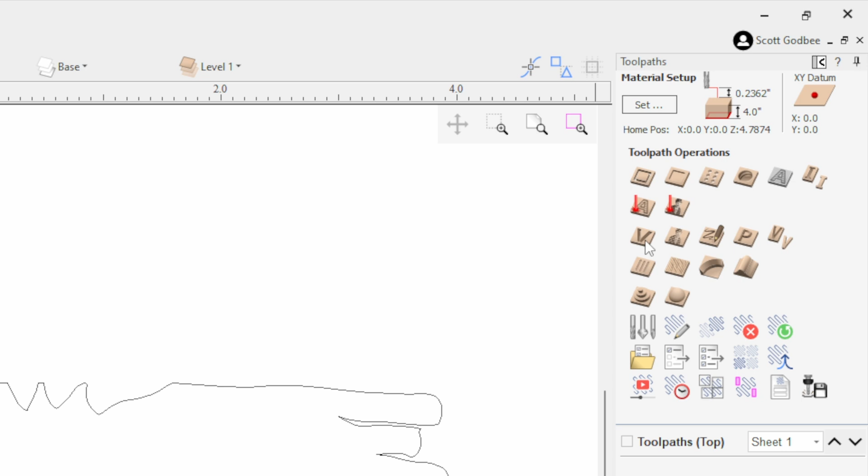Now this is the vector that I used to cut out the base and the inlay in the video you just saw previous to this. And this is going to take a little bit of editing for it to fit right. If I were to just use this vector as it is now, I am pretty sure that the inlay would not fit into the pocket. And here's why. If you have a general understanding of how vectors work in relation to the toolpath, if you don't, you should, and maybe this will help you understand it a little better.

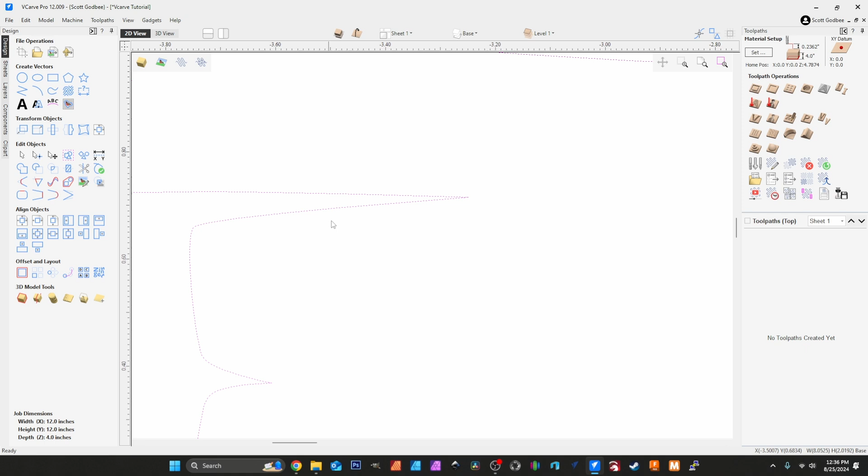You can consider a vector an impenetrable boundary that cannot be crossed by your bit. It can cut on the outside of it, it can cut on the inside of it, but it cannot cut through it. Now to show you an example of what I'm talking about, let's just create a circle. It'll be 1/4 of an inch in diameter. And this will signify just a standard 1/4 inch end mill.

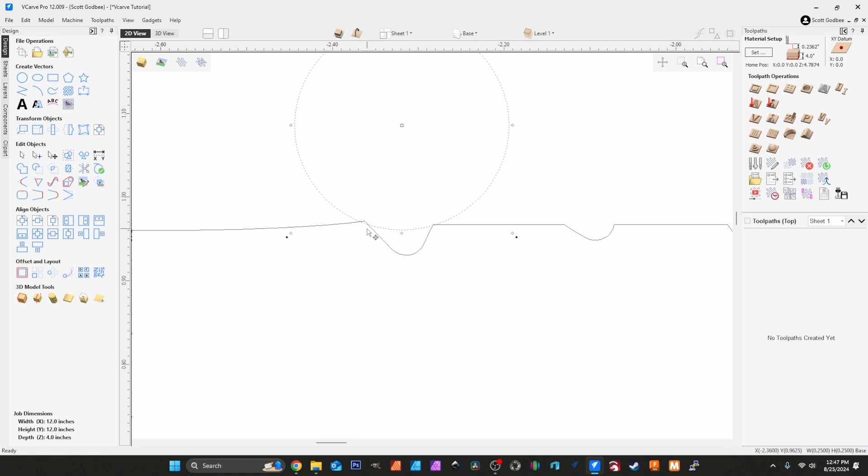If we were cutting on the outside of this vector, it would follow the vector, but when it comes to small areas like this, because the diameter of your bit is larger than the distance between these two vectors, it's not going to cut into here. It's going to keep going until it is able to cut in between two vectors, and there's not a whole lot here.

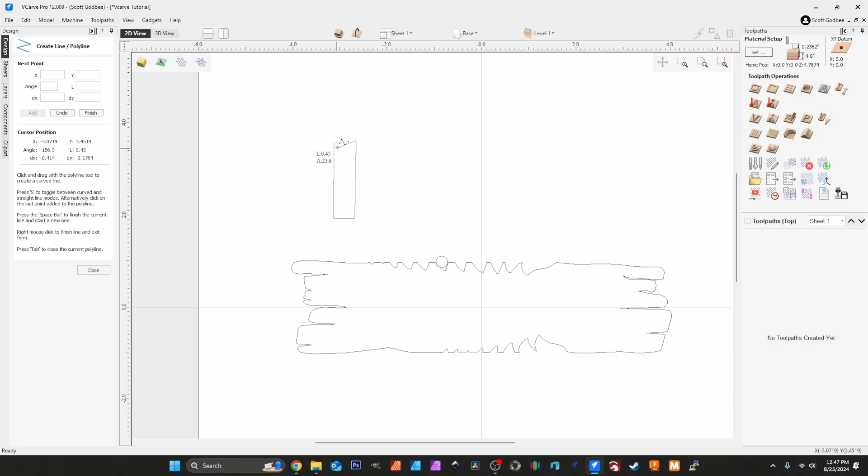Say for instance, if we were to cut into there, it would cut down that far, but it's going to leave this out. And it's going to do it all the way around here because, as you know, a standard end mill is going to be square. There's no taper. It's just straight up and down on both sides. Now when we're doing inlays, what we usually use is a tapered end mill.

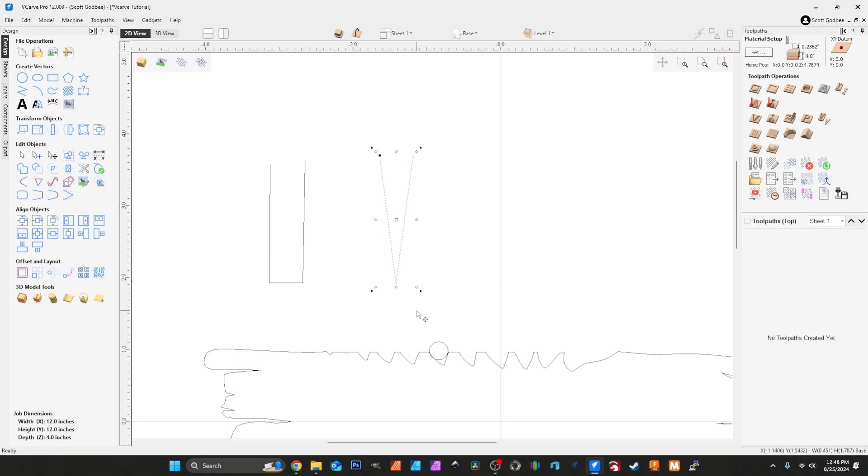And like the bit that I use for my inlays, the tip is 10/1000ths on the very bottom here on the tip, but it will increase as the angle goes up until you get to the top of the bit, and that's generally 1/4 of an inch depending on the bit that you're using. So the depth that this bit will cut varies because of the angle here as opposed to what it can get in between here. So let me show you another example.

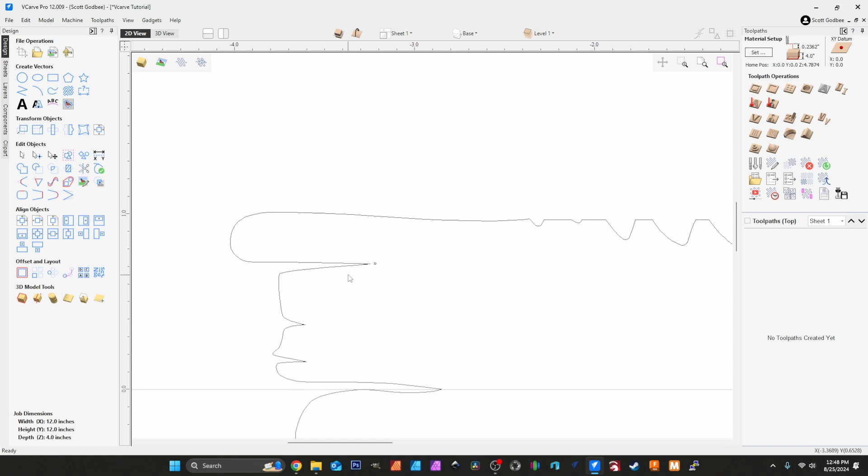Let's get rid of these guys here. Get rid of him. Get rid of that. Now let's create another circle, and this time we'll use a 10/1000th diameter, and this will signify the tip of your tapered bit, at least mine. Now some will vary. You need to know the specs of your bit. Some will be 10/1000ths.

I don't think they get any smaller than that. Some will be 15, 20, even 30/1000ths. So you need to know the specs of your bit to understand what I'm talking about.

But in this case, like we just talked about, if we were cutting on the outside of this vector, it's going to follow it around the entire distance of the outside of the vector because there's nothing inhibiting it from cutting the entire length. But if we cut in between these two vectors, following along here, it's going to stop. And now this is just the tip. This is 10/1000ths.

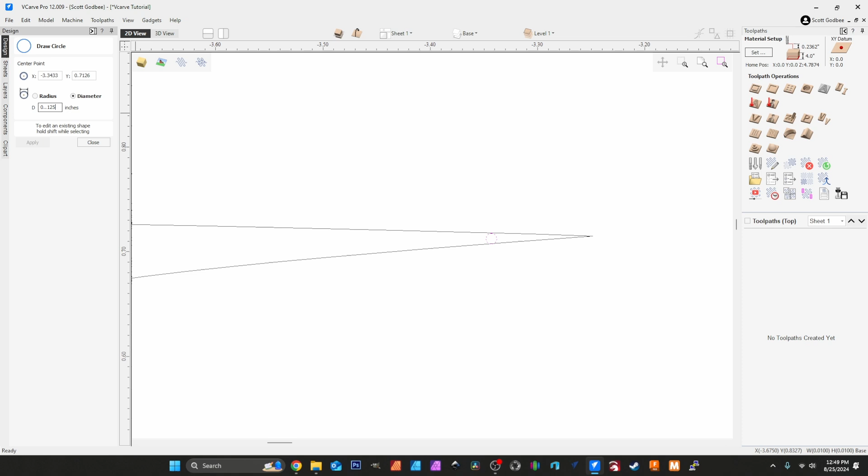If we're back here, let me leave this here. Let's create another circle, and let's do 1/8 of an inch. And this would signify further up your bit, your tapered bit, that part of the bit is not going to fit in between here, so your depth will vary.

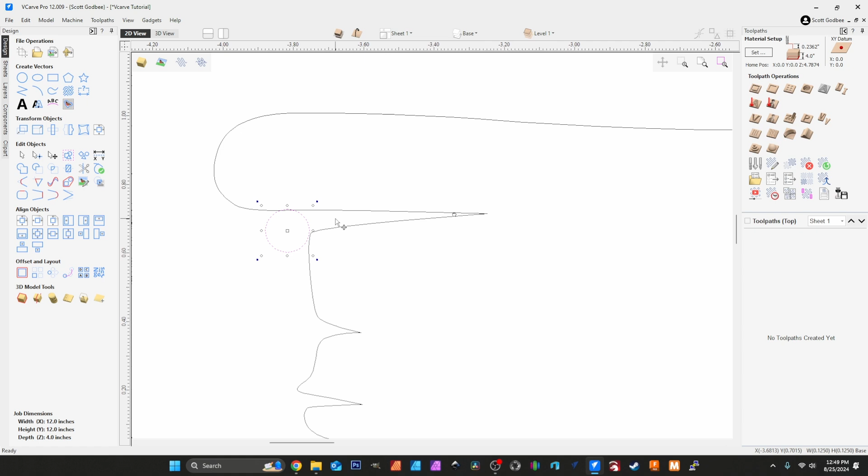I see posts all the time of guys asking why, if they're trying to cut 1/8 of an inch or 1/4 of an inch deep, they're not getting that depth in between these narrow vectors here, and that's why. Because let's say, for instance, this is about middle ways of the bit. If you're using a 1/4 inch bit, this is going to be about the halfway mark, okay? So it's not going to fit in there at all.

This being the 10/1000ths, it will fit in there, but you got to think, you're not going to have any depth here at all, because it is just grazing the top of your wood right now, because the fatter part of the bit will not fit in there. I hope that makes sense. So with that being said, let's get rid of that guy there.

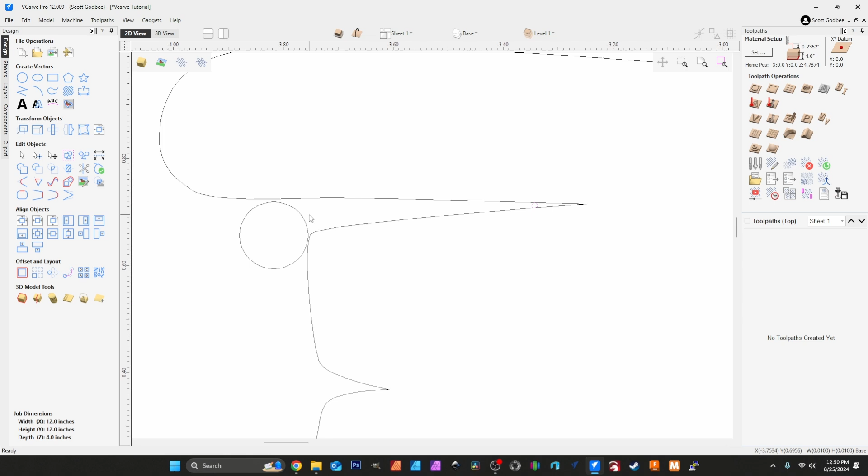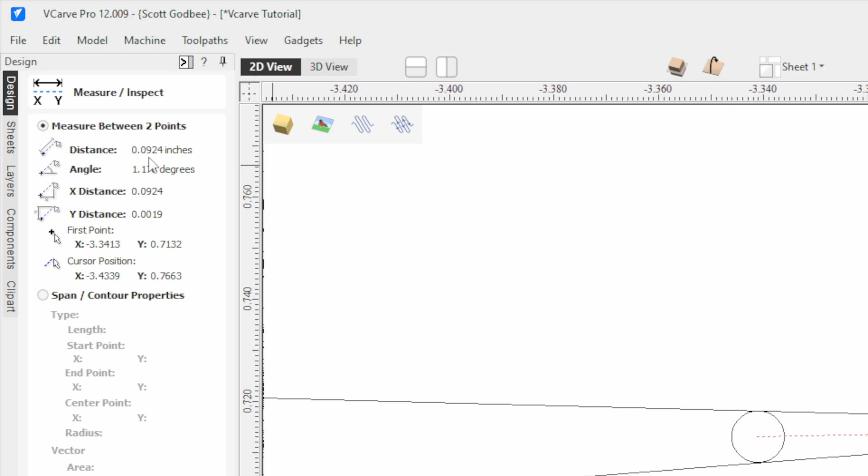So if you were cutting in between these two vectors here, and again, this signifies the very tip of your bit, that's as far as it's going to go. And if we were to measure that from here to here, we see that that is just shy of the 1/10 of an inch of area that's not going to be cut out of your base or the inlay, whichever this signifies on your image. And that is why your inlay will not fit into your pocket cut when you're trying to fit it in.

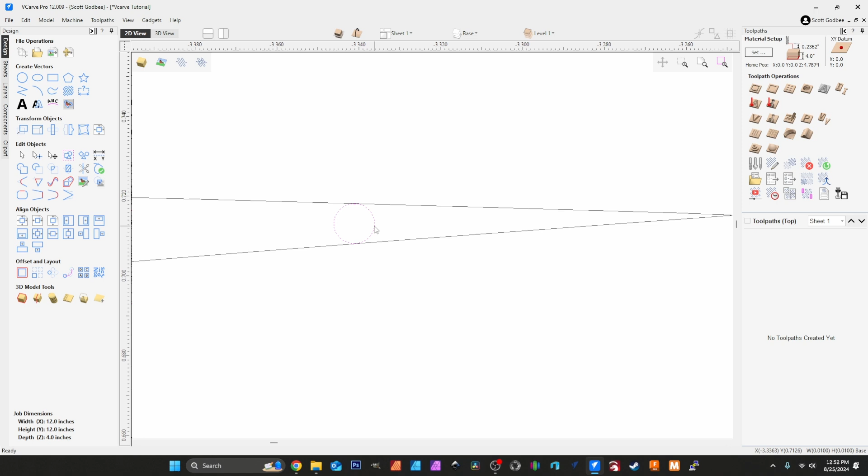Well, how do we fix this, Scott? Well, I'm going to show you. Now, what I like to do when I'm editing my vectors is I'll do exactly what I did here. I will create a circle that is the diameter of my tip diameter. In this case, we're going to keep this 10/1000ths circle, but a lot of times, to give me a margin for error and to get decent depth on the inlays, I may even create a circle that's 20 or 25 thousandths, so I know that I'm getting good depth on all parts of the inlay. But again, for this demonstration, we'll just keep it at the 10/1000ths.

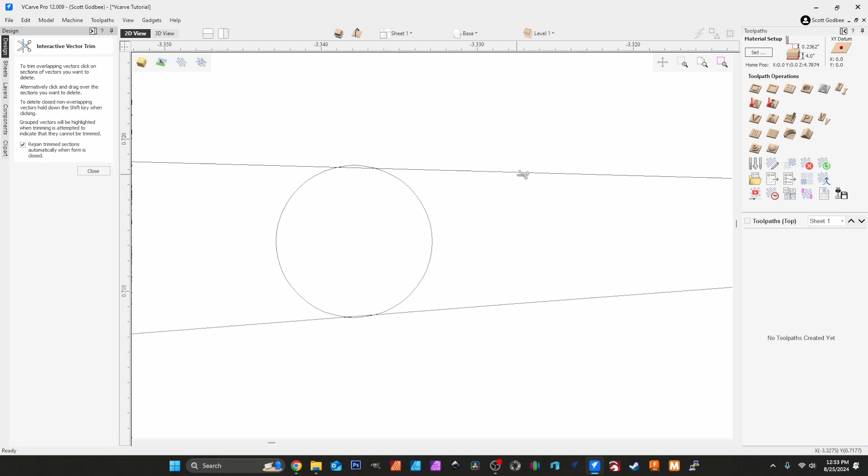So what I do is I will move it over until it touches both of the vectors. And this is quick and dirty. I'm going to leave a little bit of overhang here just for ease of cutting. But we're going to cut out of the vector image what we know that the bit is not going to cut. So we'll cut that there, clean that up, clean that up.

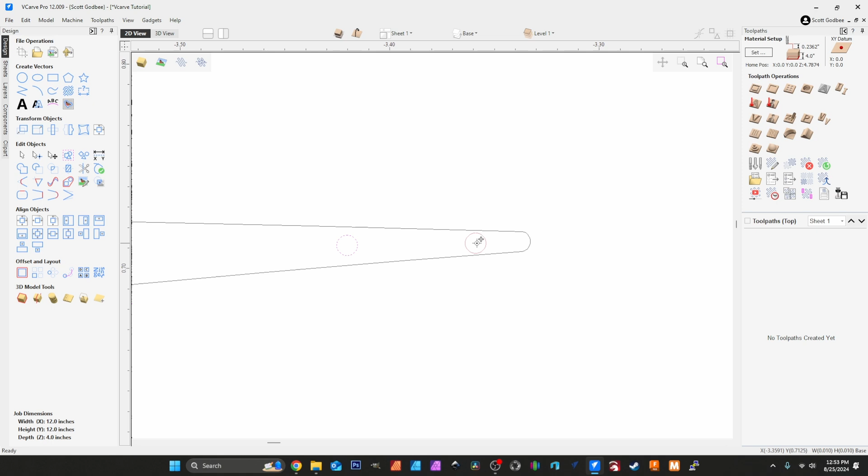And now we know, we'll make another circle, that when the tip of your bit cuts here and it stops, we're not losing any part of the vector image that won't fit with each other. Because as you know, when you're doing V-carve inlays, you have to have a base cut and a mirror image inlay cut. So now we fixed that one. Let's go find another one.

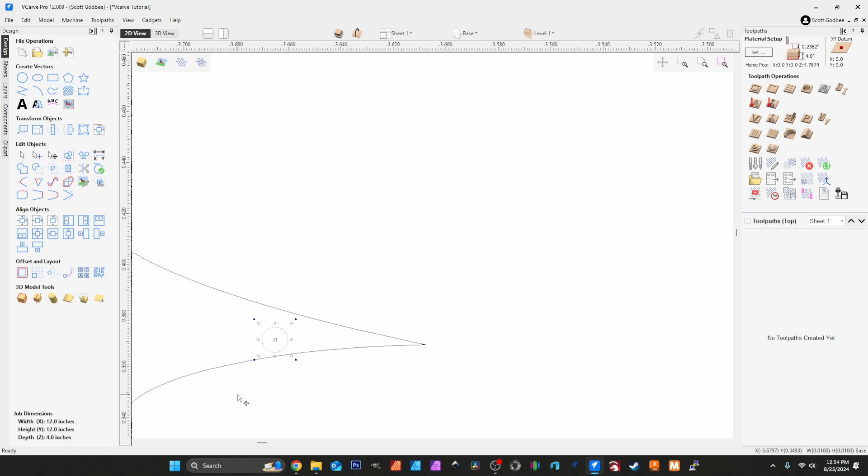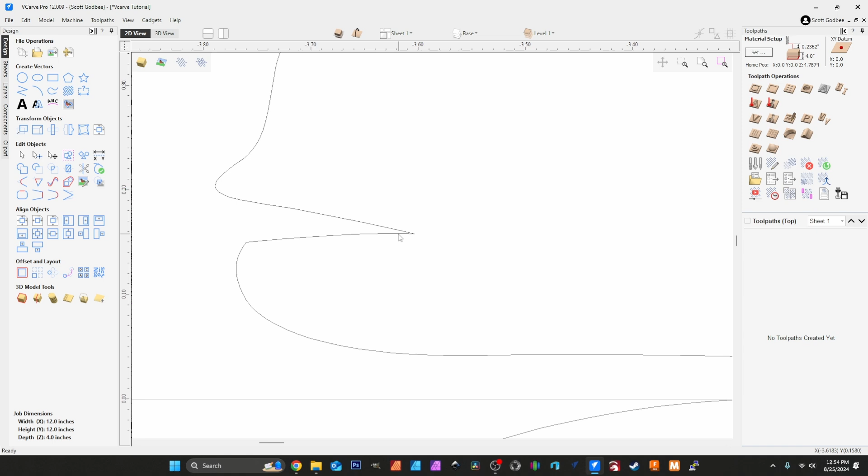There's one right there. So we'll move this guy over here. I will move it in until the vectors stop, and again I'm going to let it overlap just a little bit. We'll go to our trim tool, we'll trim that down, clean that up, and then we'll join them together, and we have these two areas fixed. And you have to do that for each narrow angle that comes to an infinite point like this. So I'll just create a bunch of circles. And I'll go to each one.

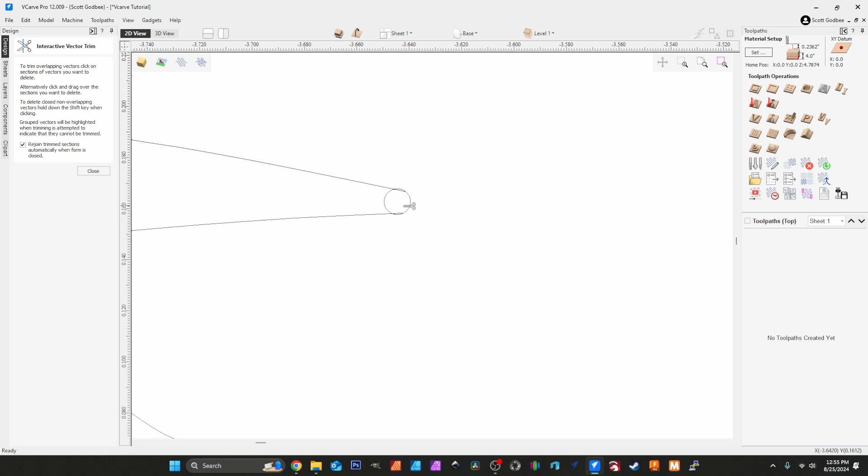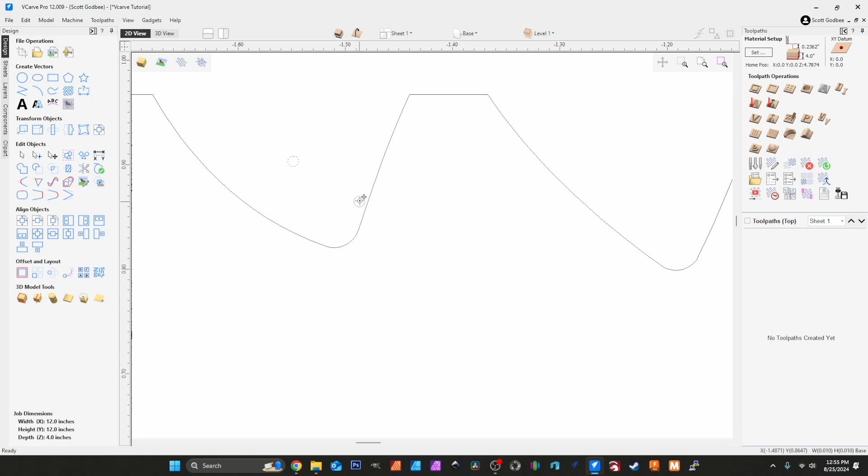And I will edit each sharp angle tight corner so I know that my bit will fit. And you have to do that for every sharp corner on your image. Now these are okay, these are rounded off because we'll fit that in there. And you can see this point will easily follow along on the inside or outside of the vector. So these are okay.

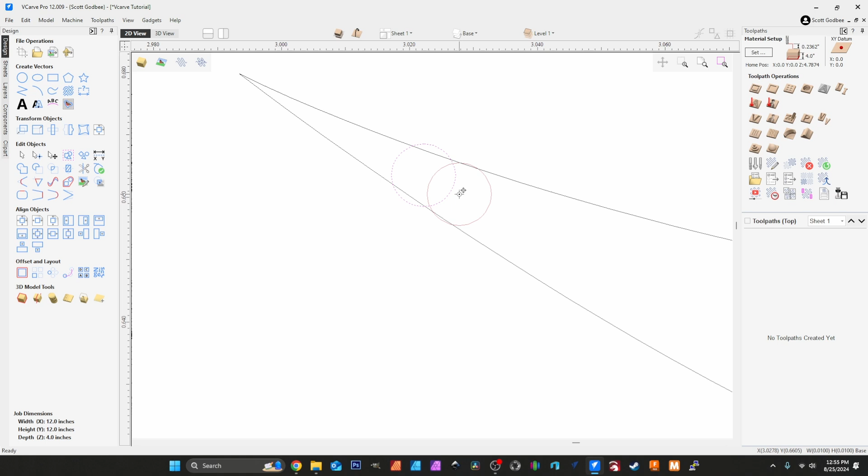This would be a prime candidate. So we bring that up into there. And again, this is quick and dirty. If I'm being a little bit more elegant with it, I'll pull it back to here. Because again, you have to have a little bit of overlap for the trim tool to work. And that's fixed. And you'll have to do it for every sharp angle, even that guy right there.

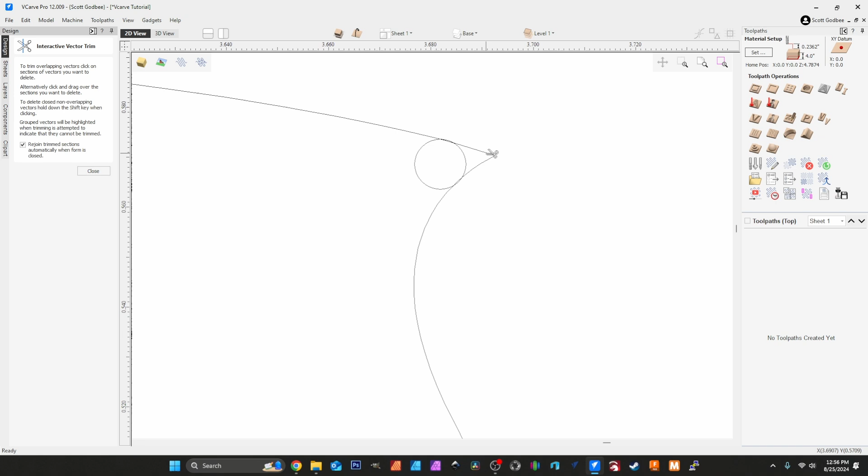Let's create a circle here. We see that that's not going to cut properly, so we need to trim that away. Trim away what we know is not going to be cut. Trim away the excess here. And there you go. And you have to do that for each sharp angle.

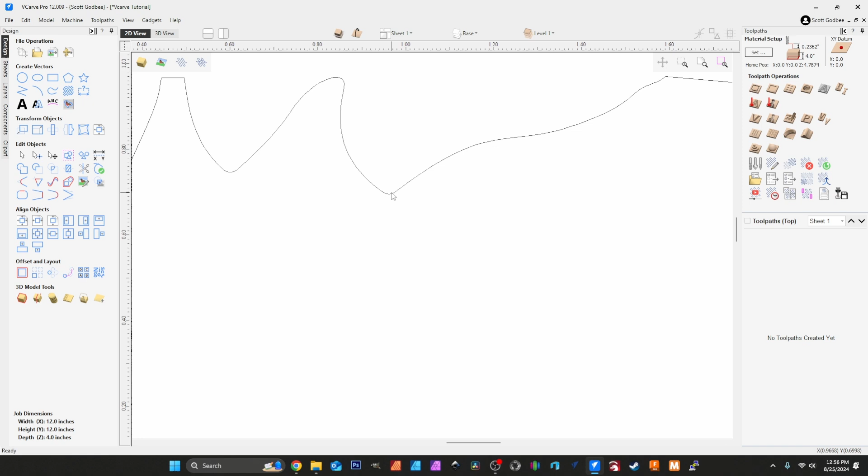Now, I haven't put a gauge to it, but I think anything less than about a 30-degree angle you would need to fix. When you have wider angles like this, like I just demonstrated, you don't have to do it. And you certainly don't have to do it for a square. For a 90-degree angle, you wouldn't have any problems, not at all. So you can leave these sharp corners.

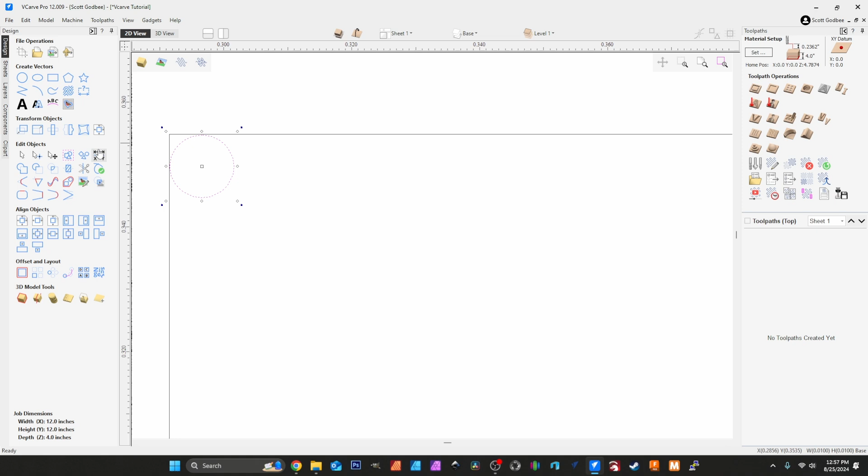It does pose a small problem because it's not going to fit completely, but that is such a minuscule amount. We'll measure from here to here. I mean, that's 2/1000ths. You'll never see that. So you don't have to worry about broad angles.

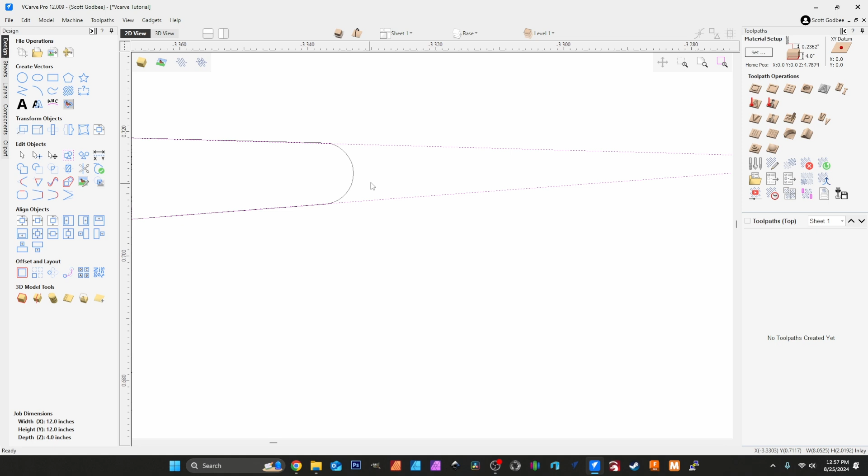And finally, to show you the difference, I've got an inlay vector here, and this is the edited vector we just did. This is the non-edited vector, and you can see the parts of the vector image that would not be cut as compared to the ones that we just edited. So if you can imagine trying to fit that into that, that's why your inlays aren't fitting into your pocket correctly. And this is the biggest thing that really affects your inlays.

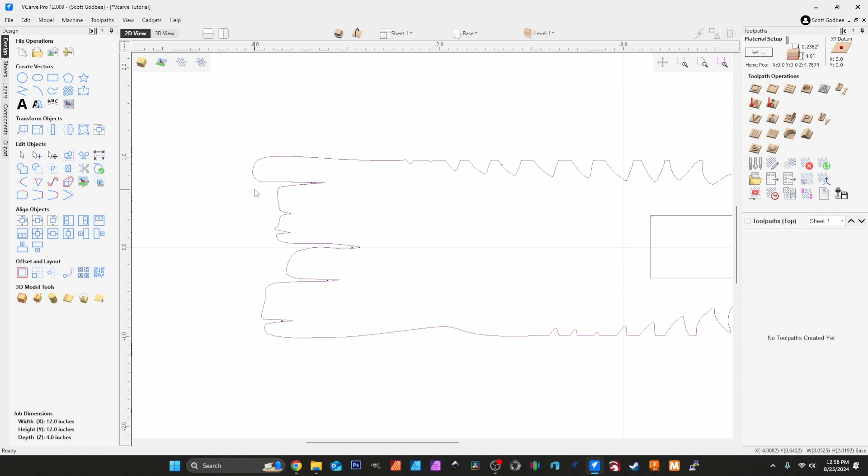I've talked about how the calibration of your machine is important. It is. The specs of your bit being entered correctly into VCarve. It is. But this is 50% of the battle here, guys. You have got to edit your images properly to make sure that they're VCarve friendly and your inlays fit properly.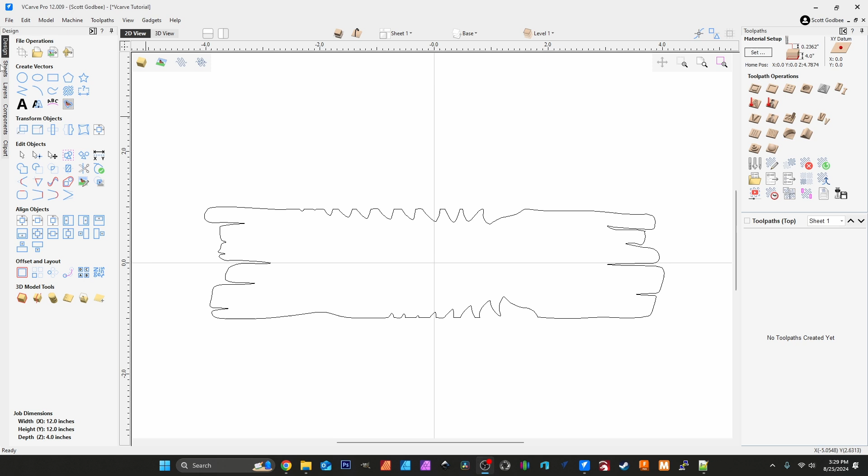And finally, it's worth mentioning, you don't have to edit each vector independently. You can just edit one vector and then copy it for your inlay. And I'll show you, we'll go and we'll delete this. So if this was our edited vector, let's create a new layer and we'll call it inlay. And we just copy this vector to the inlay vector. We can turn that off.

And now all you have to do is flip that horizontally. And of course, you have to draw a boundary around it to encapsulate whatever your inlay vector is going to be. And you can create your tool path. And now you have two edited vectors that will fit identically in each other because, like I said, you've edited all these sharp corners.

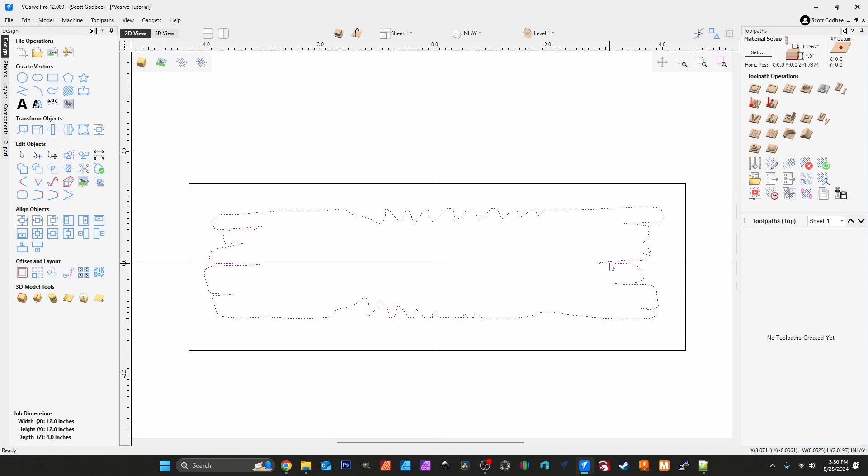So there you have it. If you've been having problems with your inlays fitting into your pockets, this may be the solution to your problem. So be on the lookout for a video on this particular inlay. This is one of the first cuts I made on a cutting board I just created. So be on the lookout for that video.